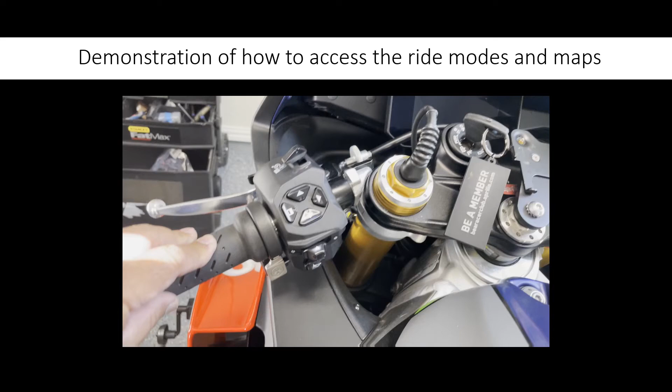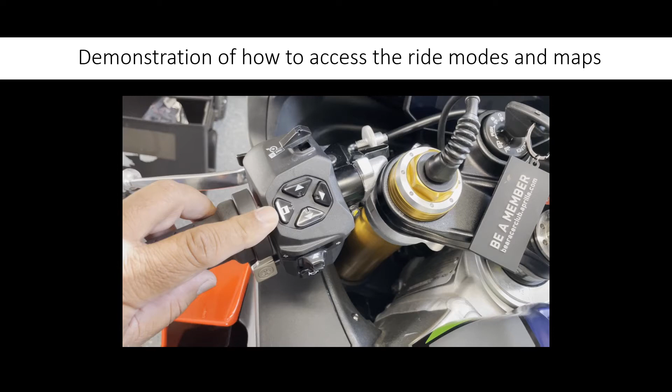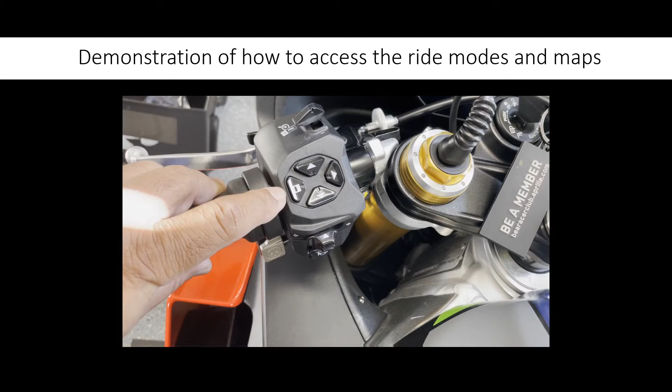The first step on the bike is to understand how the buttons work. I haven't switched on the bike yet, but you can see that on the left hand side we've got 1, 2, 3, 4 buttons. We're going to call this the mode up button, and that's the mode right button. This is the mode down button, and you would think this is the mode left button, but it's called the mode set button in the manual. So instead of the left button, it's called the mode set button. So mode up, mode down, mode right, mode set. And then on the right hand side, there is a mode select button that also needs to be used.

When you turn the bike on, it is supposed to default to the road mode. Now, I haven't found that that is always the case, but in this case, you'll see that it has defaulted to the sport map, which is within the road mode. As I explained earlier, there are 3 maps within the road mode. The sport map, and if you want to toggle to the next map within the road mode, you would just press and release this button, and it switches from one map to another within the road mode. So this is the user map, that's the street map, and that's the sport map. All right, so the 3 maps within the road mode are accessed simply by pressing these buttons. You don't need to touch any of the left-hand side buttons.

It's user, sport, user, street, sport. Okay, let's say you want to get out of the road mode and you want to get into the race mode and access some of the maps in the race mode. How do you do that?

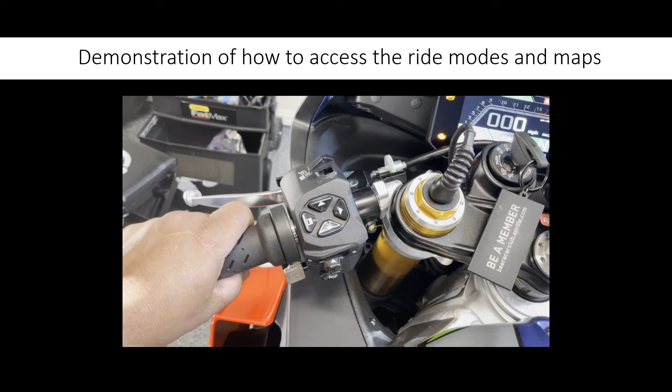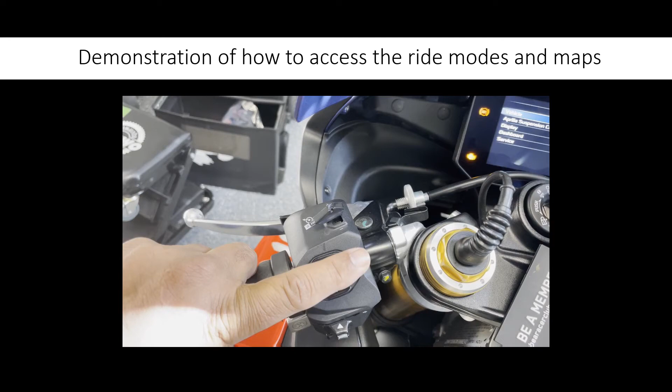Well, now you've got to go to the left hand side and press and hold the mode right button. If you press and hold the mode right button, you will see that it switches to the menu screen and the vehicle tab is highlighted, and that's what you want. With the vehicle tab highlighted, you go back and touch the mode right button once, just touch it. You can see that the ride mode tab is now highlighted, and it shows that the bike is in the road mode. If you want to switch to the race mode, you would tap the mode right button again, and once you did that, you're in the race mode.

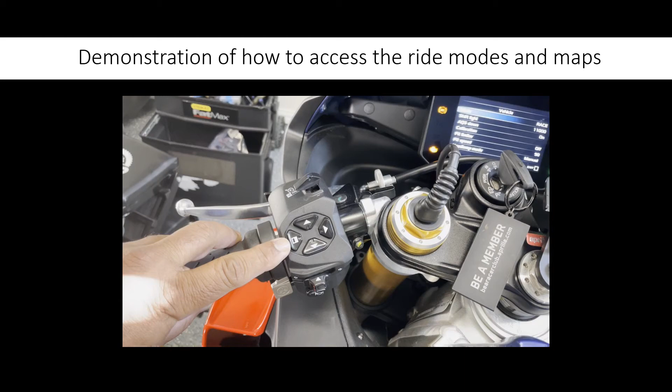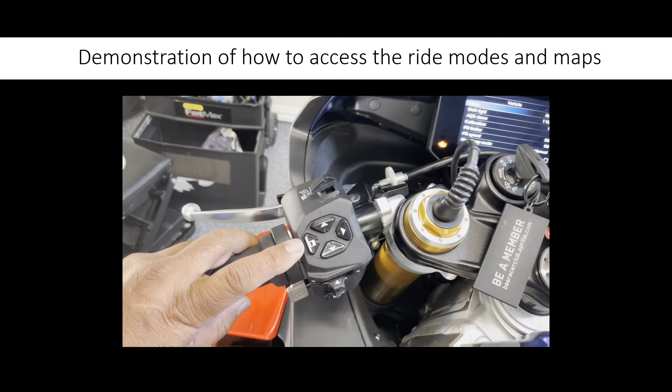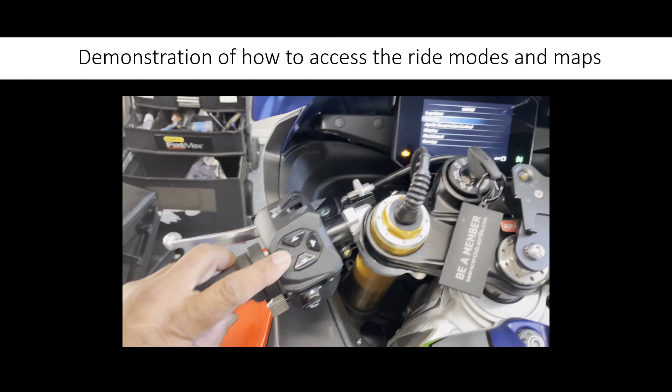Now we want to exit this screen. To exit, you would touch the mode set button. That's also visible at the bottom of the screen where it says exit. That exit is achieved by touching the mode set button. So if I just press and release the mode set button, it goes back one screen to the previous screen. And if I touch the mode set button one more time, just press and release, it is now in the race mode, and the track 1 map is what is active.

Again, if you want to toggle among the 3 maps within the race mode, we move to this button here, and if we just press and release, it goes to the track 2 map. And now it's in the race map within the race mode. Track 1 map, track 2 map, race map.

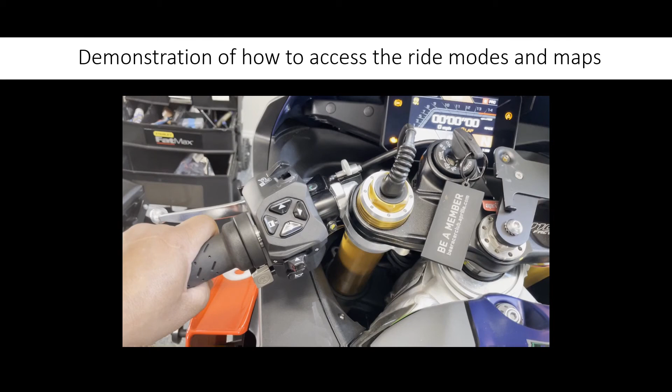Now again, to summarize, if you want to get out of the race mode and get to the road mode and access one of the maps there, go back to the left-hand side buttons, press and hold the mode right button. You are in the menu screen. We want the vehicle tab to be highlighted. I would press the mode down button to access the vehicle mode. Now it's in the vehicle mode. I would select it by hitting the mode right button. The mode right button shows that we are in the race mode. I want to get to the road mode, press it again. Now we're in the road mode.

So now we want to exit the screen. I would press the mode left button to exit one level, press the exit button again to exit another level, and now you are in one of the maps in the road mode. All right, so that's how this is done. Hope that was helpful.